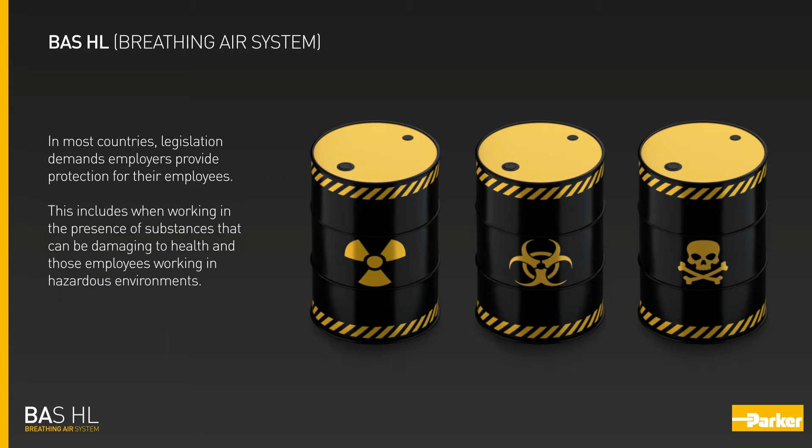Parker BAS HL breathing air system. In most countries, legislation demands employers provide protection for their employees. This includes when working in the presence of substances that can be damaging to health, and those employees working in hazardous environments. Anyone working in such environments must be provided with adequate personal protective equipment, abbreviated to PPE.

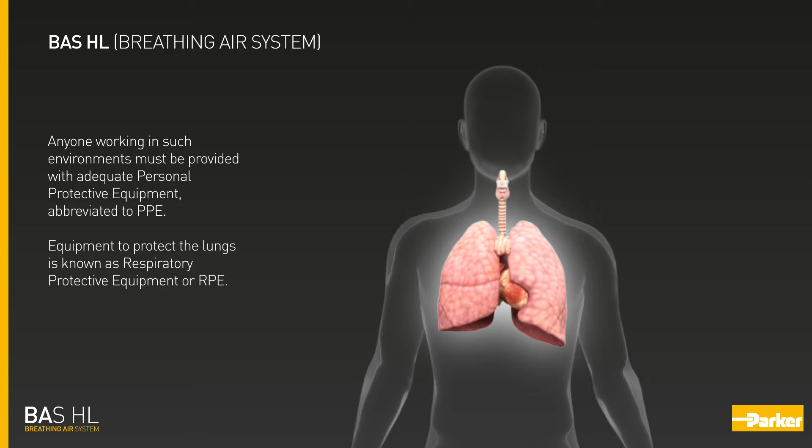Equipment to protect the lungs is known as respiratory protective equipment, or RPE. EN 529/2005 is a European Union standard document providing recommendations for selection, use, care and maintenance of respiratory protective equipment. It states that there are two distinct types of respiratory protective devices: filtering devices and breathing apparatus.

Filtering devices. Filtering devices include respirators and face masks that purify ambient air by inhaling it through a medium which removes the contaminants. Filtering devices must be matched to the substances from which the wearer needs protection. However, they typically only protect against limited concentration of contaminants. Filter-based RPE is not suitable for all applications, especially in the presence of dangerous gases or in an oxygen-deficient environment.

Breathing apparatus. Breathing apparatus is the term used to describe the devices that supply breathable air or breathable gas from an uncontaminated source. For example, compressed air or compressed oxygen. The use of high-pressure self-contained breathing apparatus is expensive, can be dangerous, and requires highly trained personnel. Therefore, for most industrial applications, compressed air-fed breathing apparatus is a more cost-effective solution, as this provides a continuous source of breathable quality air from a compressed air supply.

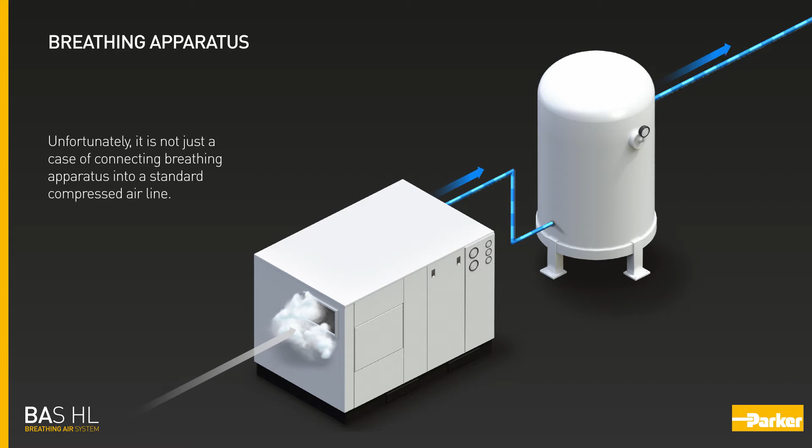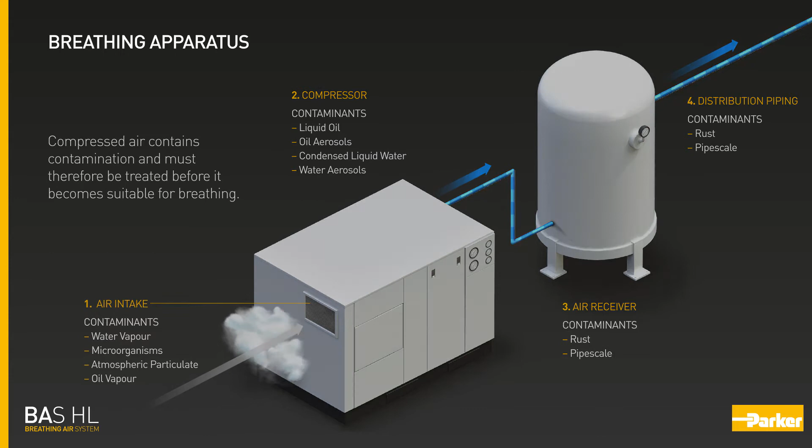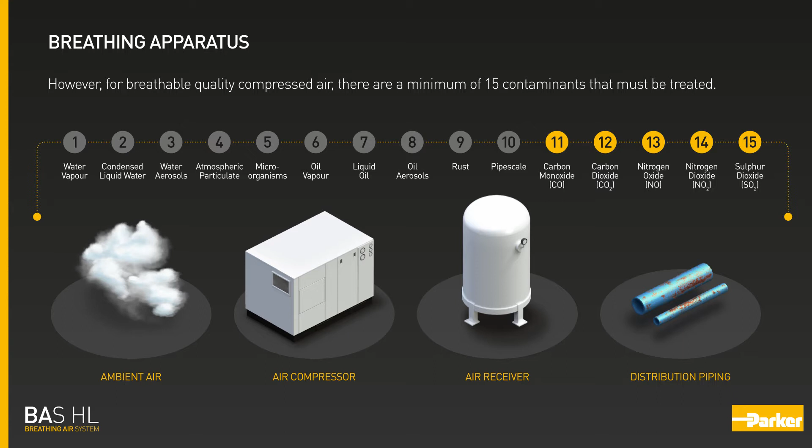Unfortunately, it's not just a case of connecting breathing apparatus into a standard compressed air line. Compressed air contains contamination and must therefore be treated before it becomes suitable for breathing. For typical industrial applications, there are a minimum of 10 contaminants found in compressed air that must be treated. These originate from 4 different sources. However, for breathable quality compressed air, there are a minimum of 15 contaminants that must be treated.

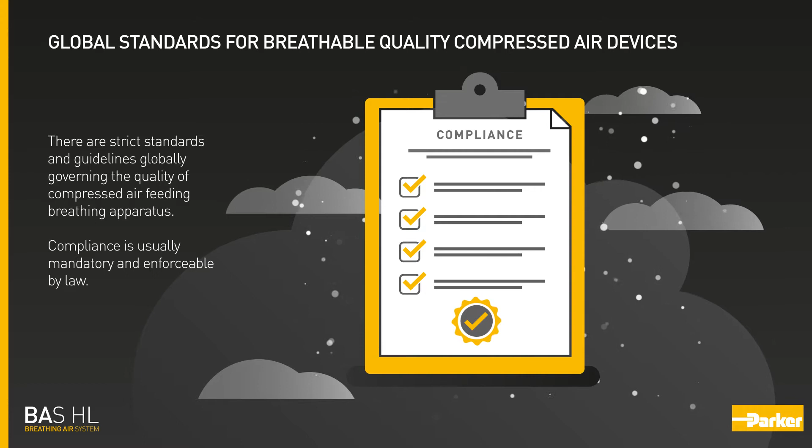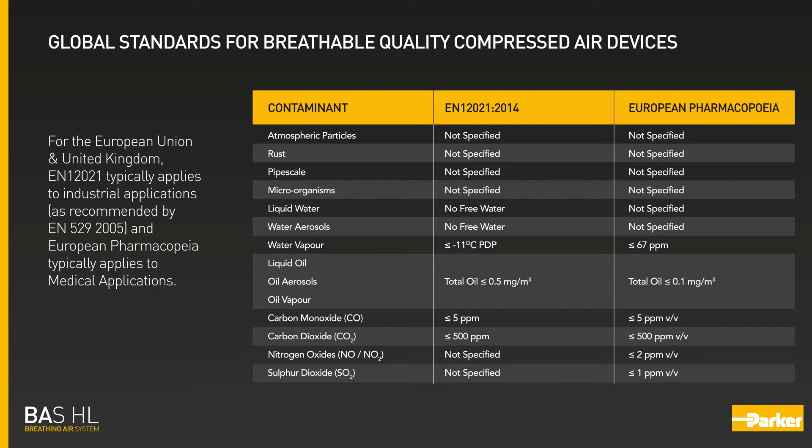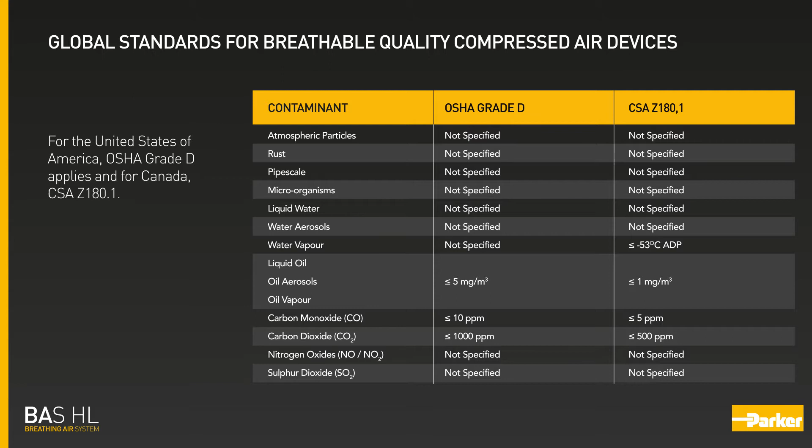Global standards for breathable quality compressed air. There are strict standards and guidelines globally governing the quality of compressed air feeding breathing apparatus. Compliance is usually mandatory and enforceable by law. For the European Union and United Kingdom, EN 12021 typically applies to industrial applications, as recommended by EN 529/2005, and European Pharmacopoeia typically applies to medical applications. For the United States of America, OSHA Grade D applies, and for Canada, CSA Z180.1.

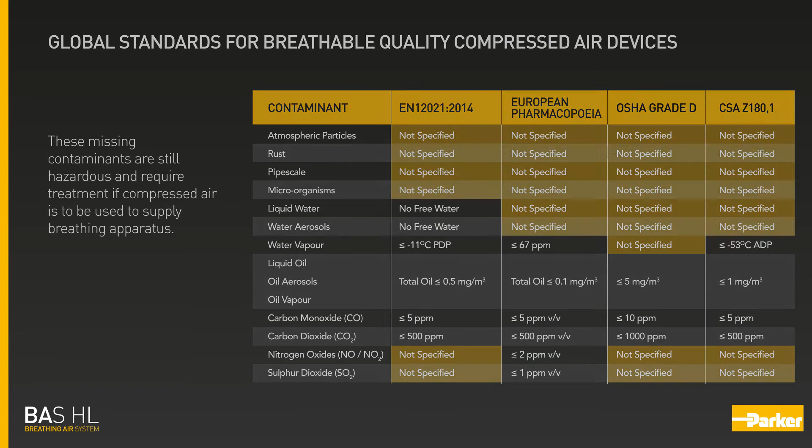It is important to note that the maximum contaminant levels allowed differs in each standard, and these standards do not have limits for all of the common compressed air contaminants. These missing contaminants are still hazardous and require treatment if compressed air is to supply breathing apparatus. Introducing the Parker BAS HL, a complete purification system for breathable quality compressed air.

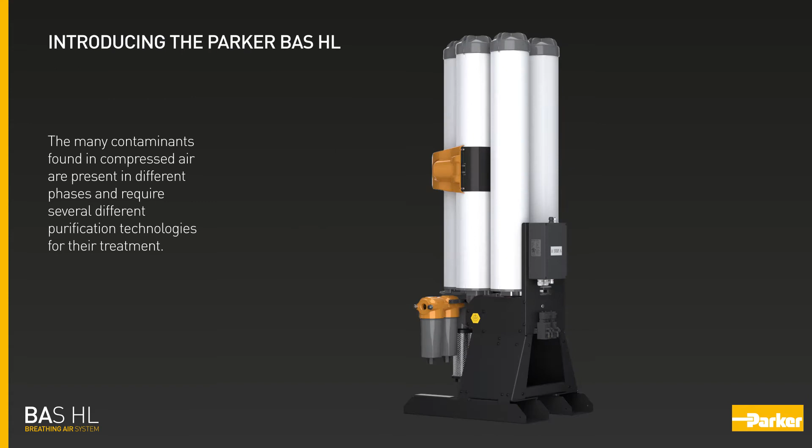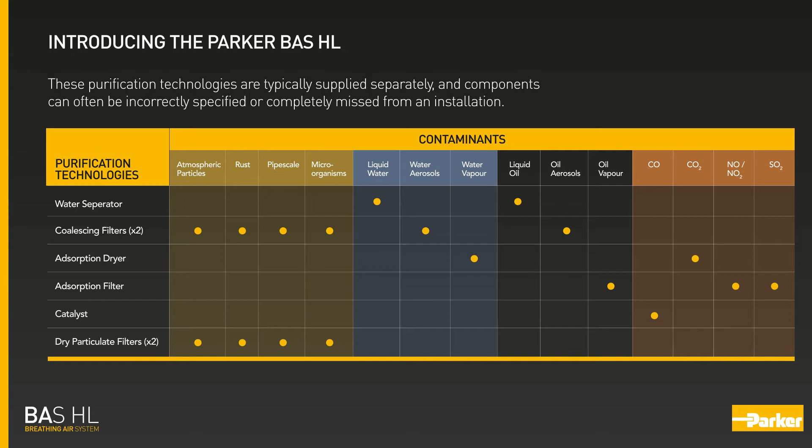The many contaminants found in compressed air are present in different phases and require several different purification technologies for their treatment. These purification technologies are typically supplied separately, and components can often be incorrectly specified or completely missed from an installation. Inadequate purification can lead to hazardous contaminants being inhaled by the user, with potentially serious consequences.

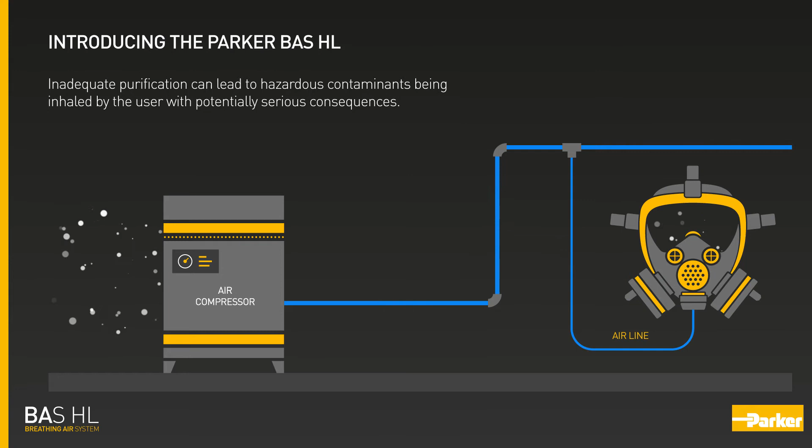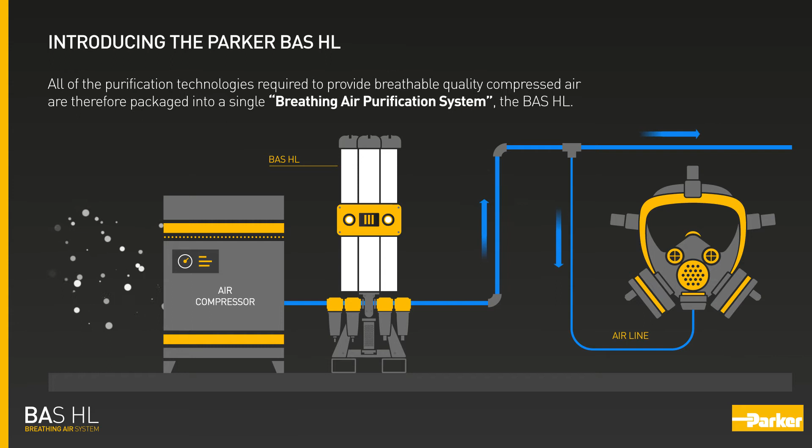The Parker design philosophy is to supply a complete purification system that treats the most hazardous contaminants found in a standard compressed air system. All of the purification technologies required to provide breathable quality compressed air are therefore packaged into a single breathing air purification system, the BAS HL. Having a complete purification system simplifies equipment selection, helps to guarantee compressed air purity, and allows the BAS HL to be tested and third-party performance validated as a complete package.

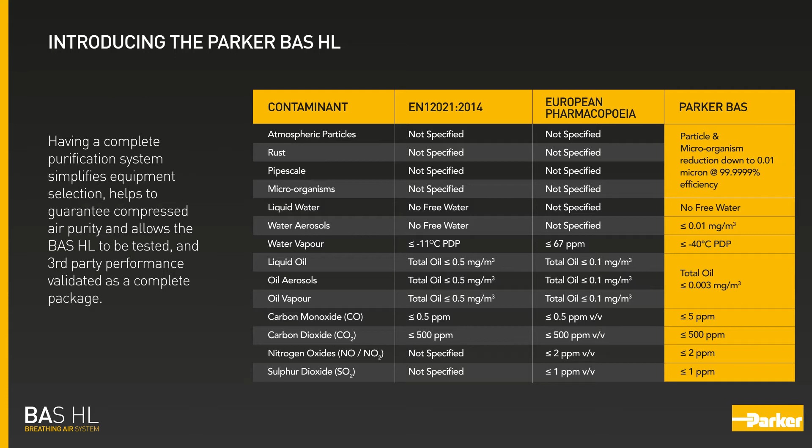The delivered air quality from a Parker BAS HL breathing air system meets and exceeds the requirements of global breathing air standards such as EN 12021, European Pharmacopoeia, OSHA Grade D and CSA Z180.1. The Parker BAS HL range consists of 8 models with flow rates from 55 to 300 cubic meters per hour or 32 to 177 cubic feet per minute.

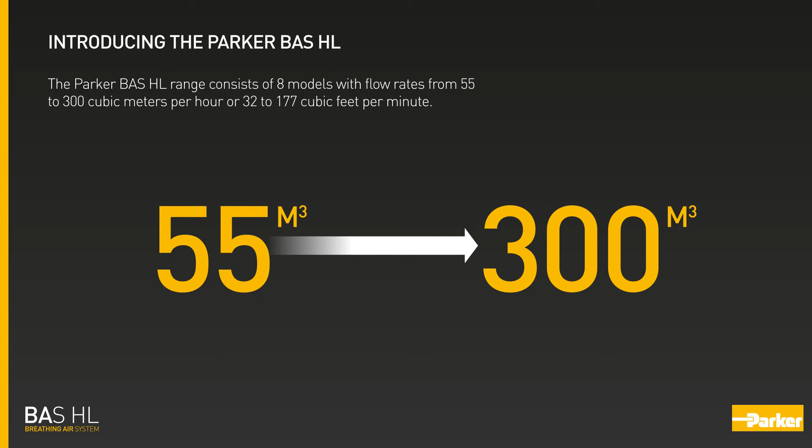Each model includes all of the purification technologies required for the treatment of 13 hazardous compressed air contaminants. The number of contaminants treated can be increased to 15, with the inclusion of an optional WS-grade water separator, should liquid water or liquid oil also be present at the inlet of the BAS HL breathing air system.

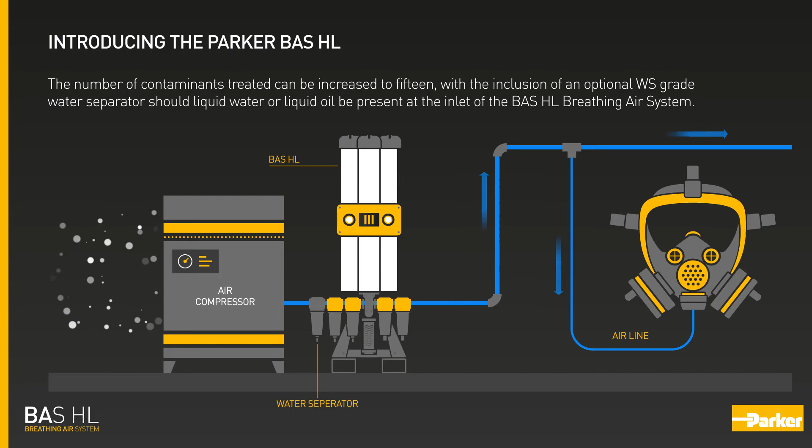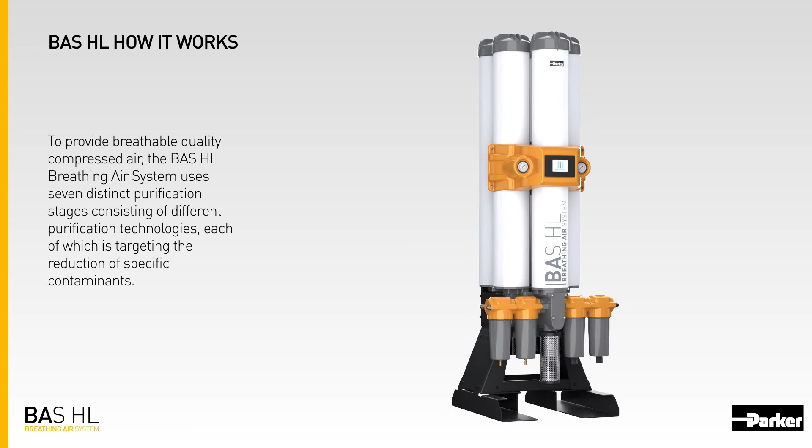BAS HL, how it works. To provide breathable quality compressed air, the BAS HL breathing air system uses 7 distinct purification stages consisting of different purification technologies, each of which is targeting the reduction of specific contaminants.

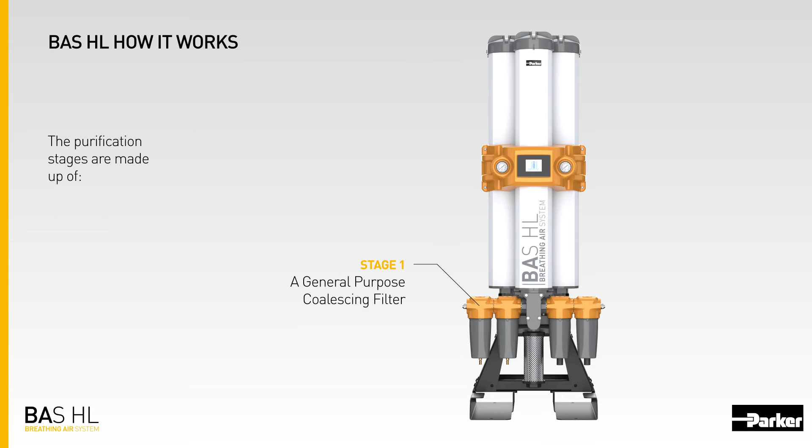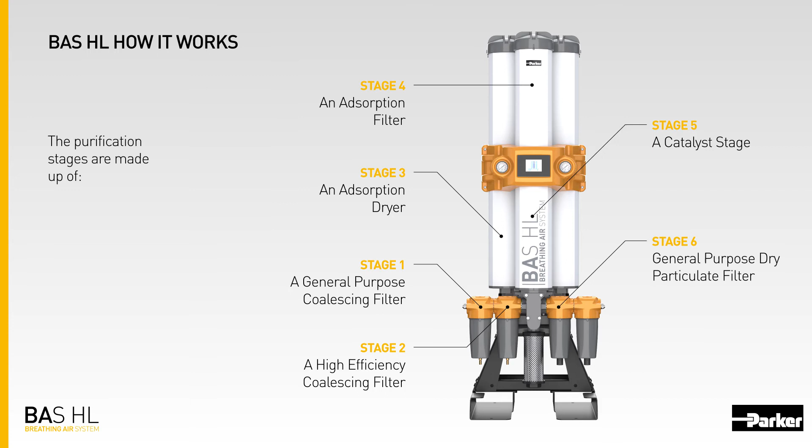The purification stages are made up of Stage 1, a general-purpose coalescing filter. Stage 2, a high-efficiency coalescing filter. Stage 3, an adsorption dryer. Stage 4, an adsorption filter. Stage 5, a catalyst stage. Stage 6, a general-purpose dry particulate filter. Stage 7, a high-efficiency dry particulate filter.

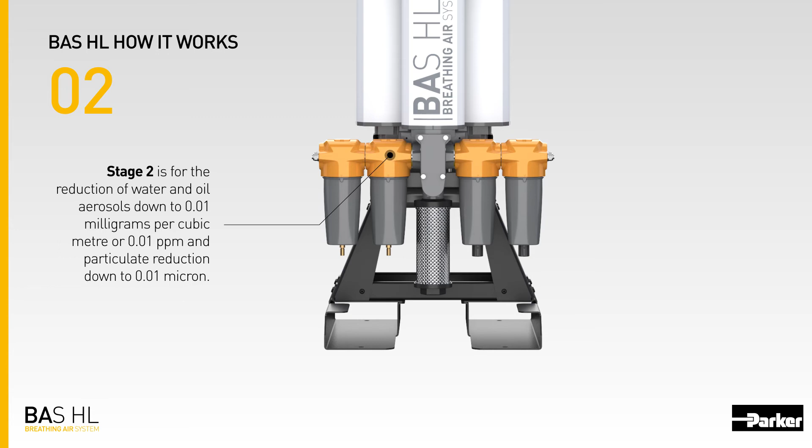Stage 1 is for the reduction of water and oil aerosols down to 0.5 milligrams per cubic meter, or 0.5 parts per million, and particulate reduction down to 1 micron. Stage 2 is for the reduction of water and oil aerosols down to 0.01 milligrams per cubic meter, or 0.01 parts per million, and particulate reduction down to 0.01 micron. Stages 1 and 2 not only reduce hazardous contaminants from the compressed air, but they also provide protection for the adsorption dryer.

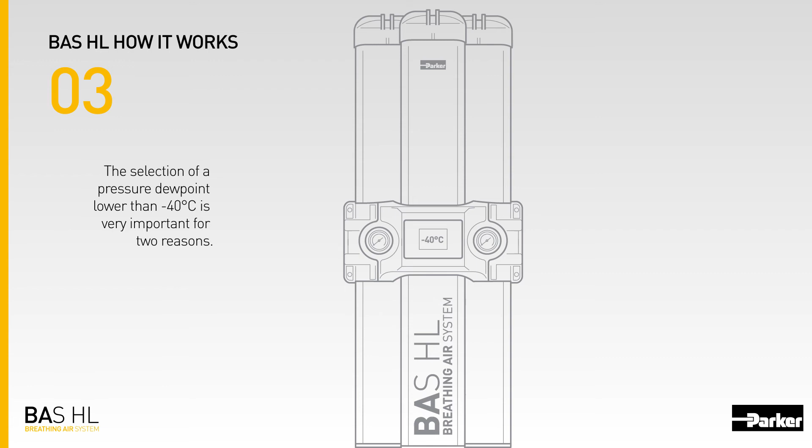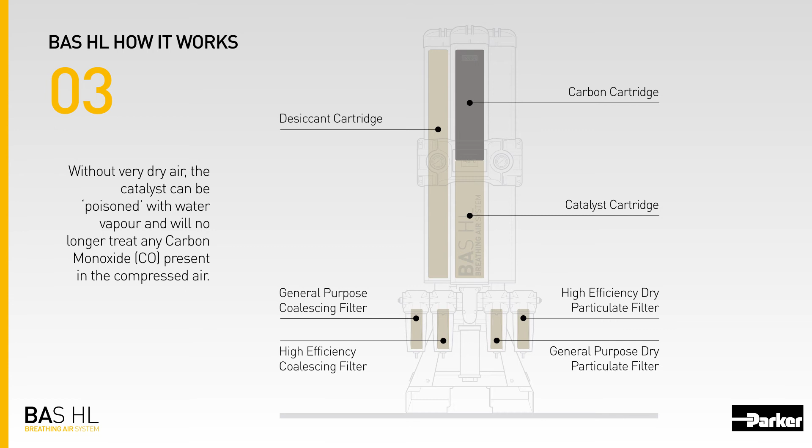Stage 3 is for the reduction of water vapor and is designed to deliver a constant pressure dew point of less than -40 degrees Celsius. The selection of a pressure dew point lower than -40 degrees Celsius is very important for 2 reasons. Firstly, a low dew point is required to protect the catalyst stage. Without very dry air, the catalyst can be poisoned with water vapor and will no longer treat any carbon monoxide present in the compressed air.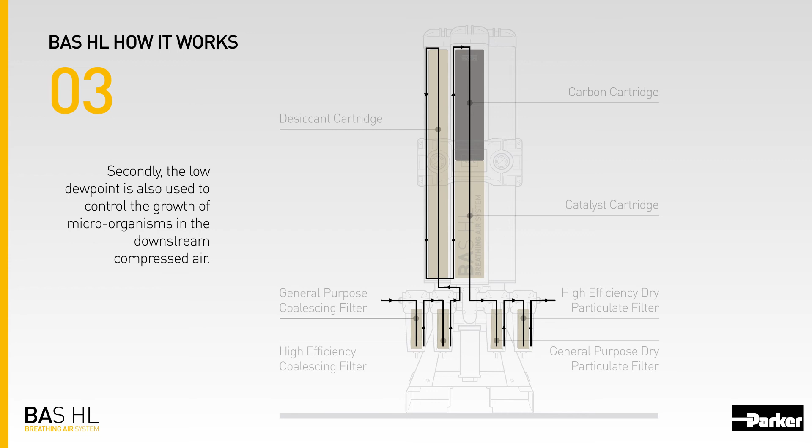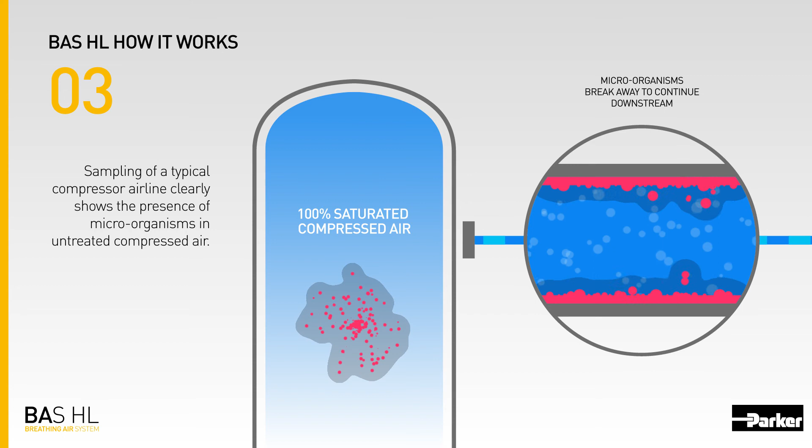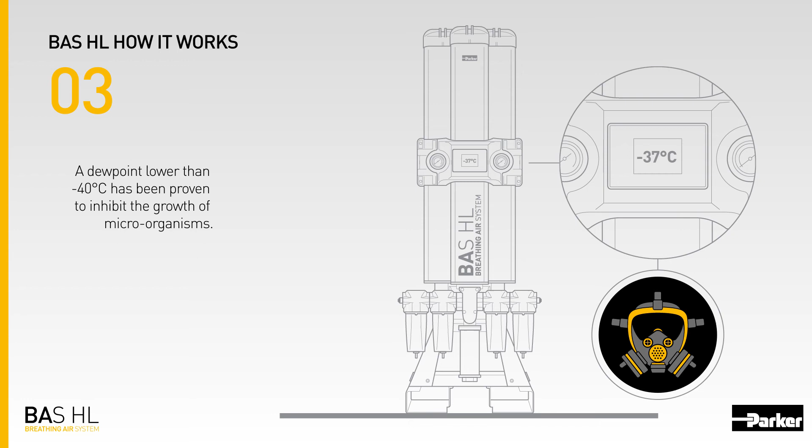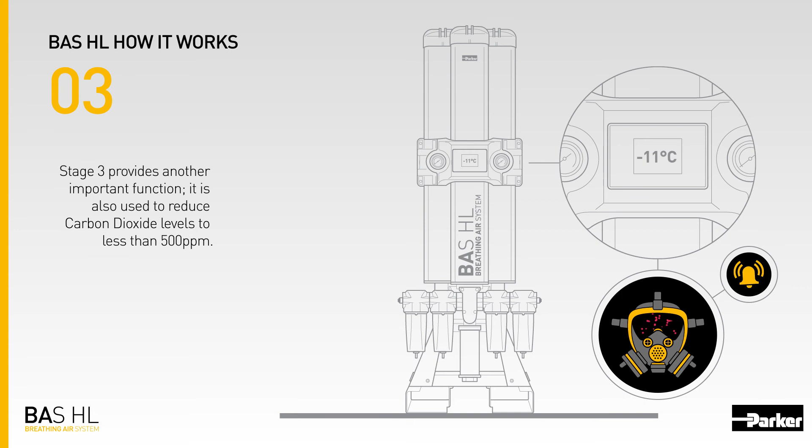Secondly, the low dew point is also used to control the growth of microorganisms in the downstream compressed air. Untreated compressed air contains millions of microorganisms that are constantly growing. Sampling of a typical compressor airline clearly shows the presence of microorganisms in untreated compressed air. A dew point lower than -40 degrees Celsius has been proven to inhibit the growth of microorganisms. Reducing the quantity of microorganisms present also improves the reduction performance of final filters. Stage 3 provides another important function. It is also used to reduce carbon dioxide levels to less than 500 parts per million.

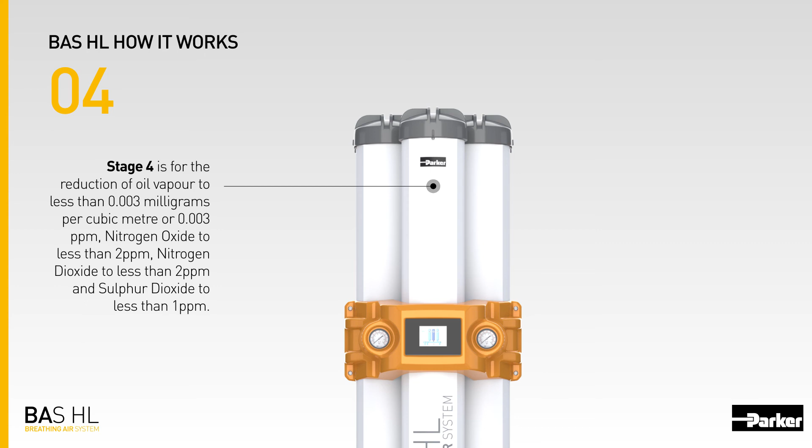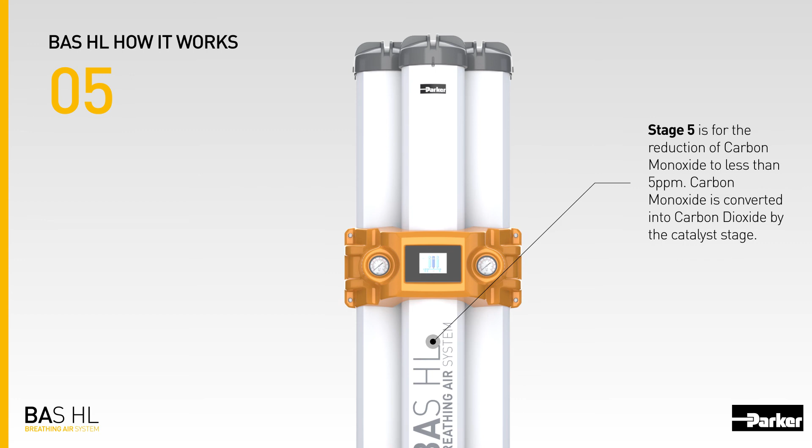Stage 4 is for the reduction of oil vapor to less than 0.003 milligrams per cubic meter, or 0.003 parts per million, nitrogen oxide to less than 2 parts per million, nitrogen dioxide to less than 2 parts per million, and sulfur dioxide to less than 1 part per million. Stage 5 is for the reduction of carbon monoxide to less than 5 parts per million. Carbon monoxide is converted into carbon dioxide by the catalyst stage.

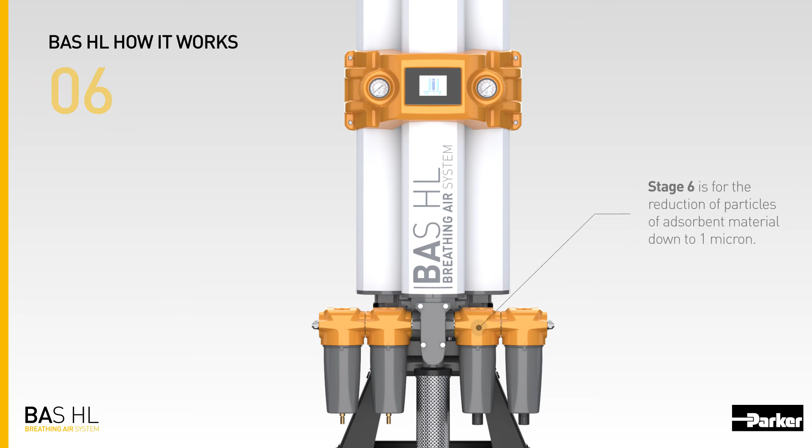Stage 6 is for the reduction of particles of adsorbent material down to 1 micron. Stage 7 is the final stage and is used for the reduction of adsorbent particles and microorganisms down to 0.01 micron at an efficiency of 99.9999%.

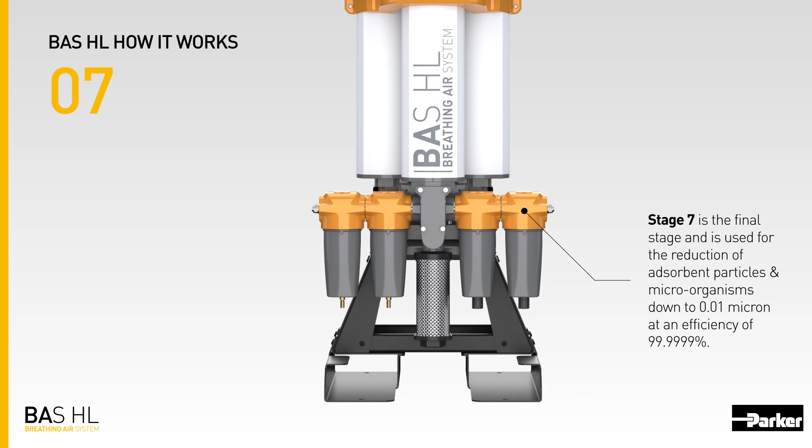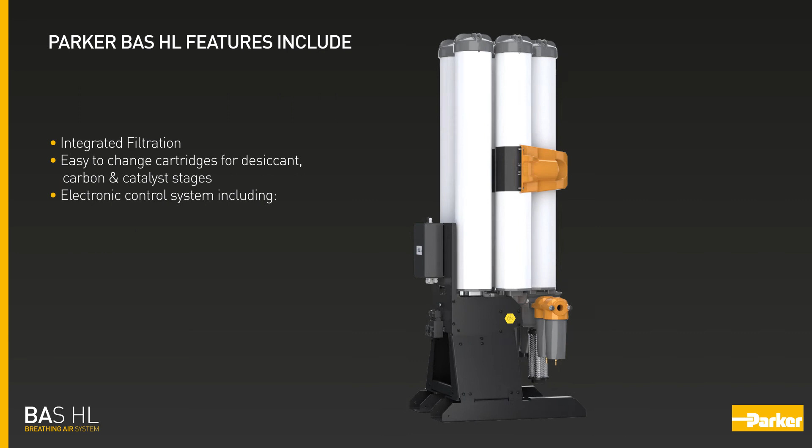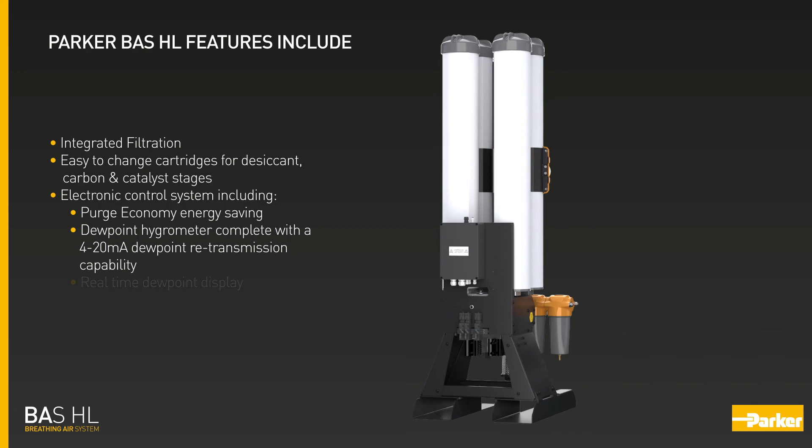Parker BAS HL features include integrated filtration, easy-to-change cartridges for desiccant, carbon and catalyst stages, electronic control system, including purge economy energy saving, dew point hygrometer, complete with a 4 to 20 mA dew point retransmission capability, real-time dew point display, remote start-stop, Modbus RTU connectivity, fault alarm relay.

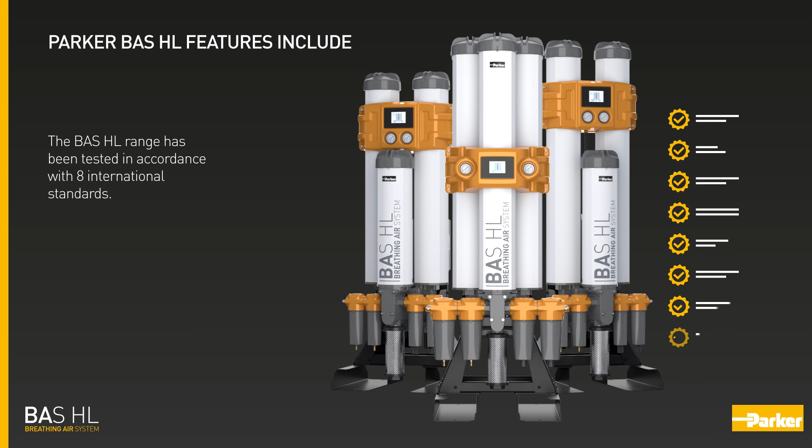The BAS HL range has been tested in accordance with 8 international standards. Outlet air quality of BAS HL has been independently validated by Lloyd's Register as ISO 8573-1, Class 1.2.0, and shown to exceed the requirements of EN 12021, European Pharmacopoeia, OSHA Grade D, and CSA Z180.1, International Breathing Air Standards. BAS HL, a complete solution to breathable quality compressed air.